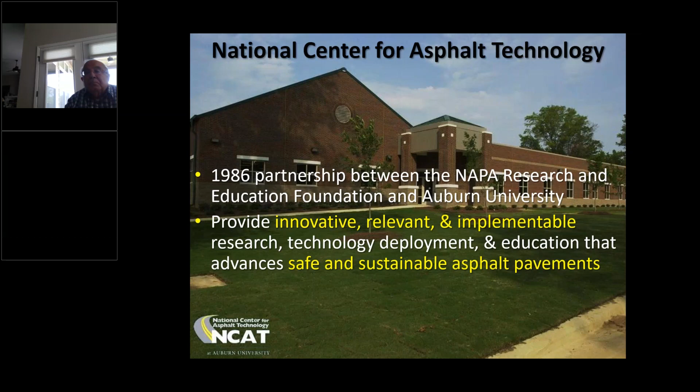Our mission is really straightforward. We do innovative, relevant, and implementable research geared towards safe and sustainable asphalt pavements, improving the value of asphalt pavements. It's a very rewarding endeavor, because we don't have an agenda. We just do research to try to make the product better and advance it. So that's the blessing to all of us.

NCAT is a nonprofit research center at Auburn University, so we don't get any earmarked state dollars or university dollars or anything like that. We execute research. The NCAT pavement test track is the biggest project at NCAT, and it has been the biggest project since we broke ground out here in September of 1998.

You can think of it as a nonprofit business. We don't get any earmarks, the track doesn't get any earmarks. We sell research to FHWA, to state DOTs, and private sector partners. Essentially, we sell test sections on the track and execute research with cost recovery for our test sections, with no profit or anything built into that.

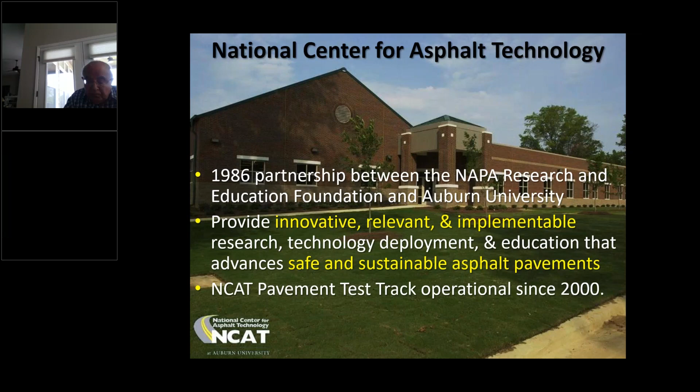This type of research is called accelerated pavement testing. We do accelerated damage, meaning that within these 3-year project cycles, the middle 2 years compress a design lifetime of pavement damage. For us, that's 10 million equivalent single axle loadings, about 1.5 million miles in 2 years of our fleet operations, using trucks like the ones you see right there.

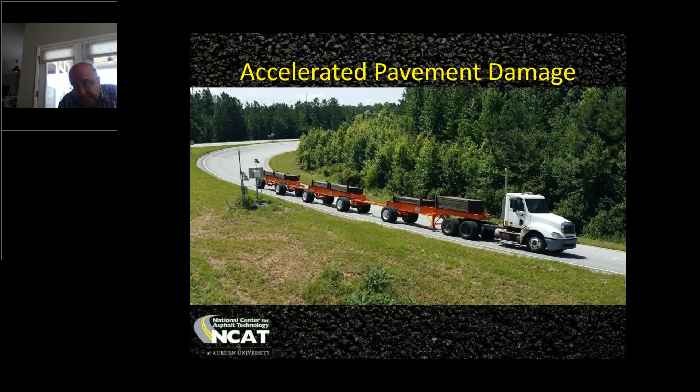We run 5 of these at a time, 5 days a week, from about 5 in the morning to about 11 o'clock at night. We shut down 1 day a week and do really detailed pavement condition assessments on the track.

I'm telling you all this as background so that you have a feel for the innovation I'm going to talk about has been proved on the track. We've supported it with implementation for projects we've done off the track, and it really all goes back to this accelerated testing that we do here at the facility.

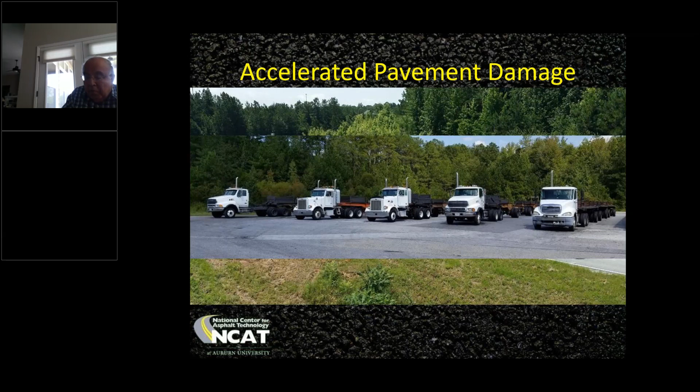Now, these trucks have really high gross vehicle weights because we don't have any bridge spans to collapse, but every individual axle is loaded up to but not beyond the federal legal bridge limit. We do that so we can have the safest and most efficient fleet operations possible in order to compress all this pavement damage.

So that we can have a thermal cracking focused performance to compare to our southern, more fatigue focused performance here at the NCAT pavement test track.

We're very proud of our relationship with the Missouri DOT. Missouri has been a partner here at the facility for about the last 15 years, has been one of our funding partners. We've done a lot of good research for Missouri, and we're excited about continuing that relationship into the future.

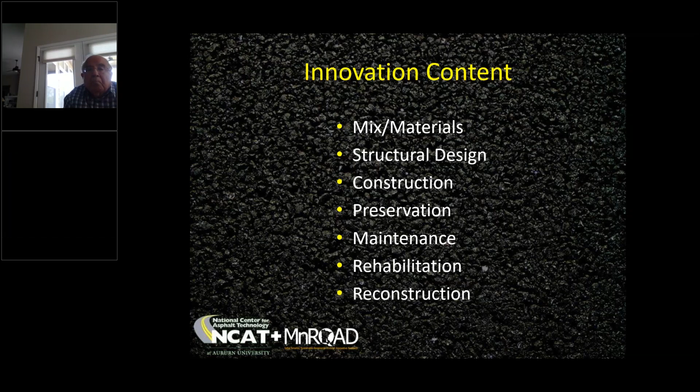So for the sake of this presentation, I thought about the conversation that Rick and I had, and the holistic approach to asphalt pavements. I'm going to touch on each of these areas. I've only got 45 minutes, so I'll go through this pretty quickly, but we're going to go all the way from mix and materials through thickness design, construction, preservation, maintenance, rehabilitation, and reconstruction. As we discuss innovation in these areas, the advantages of asphalt pavements is really self-evident in all of these areas. I know all of y'all are professionals, so everybody knows the terminology, but I wanted to have one slide where I explain the references that I use, just to make sure we're all on the same page.

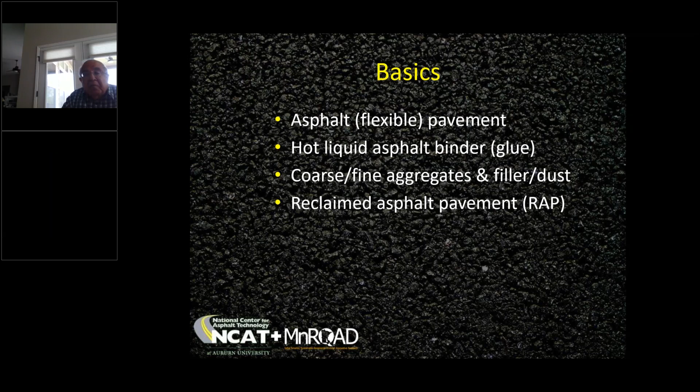So you hear people talk about flexible pavement, that's the same thing as asphalt pavements. Hot liquid asphalt, that's the glue that holds everything together. You got rock, you got sand, and you got filler or dust that you're binding together with the asphalt glue. RAP, of course, that's reclaimed asphalt pavement. RAS, recycled asphalt shingles. You'll hear me several times in the presentation refer to what I call premium mix additives - for example, aramid fibers, highly polymer modified binder, or epoxies. That's kind of a general term we're now beginning to use as we talk about adding materials to our plant mix in order to improve various performance characteristics.

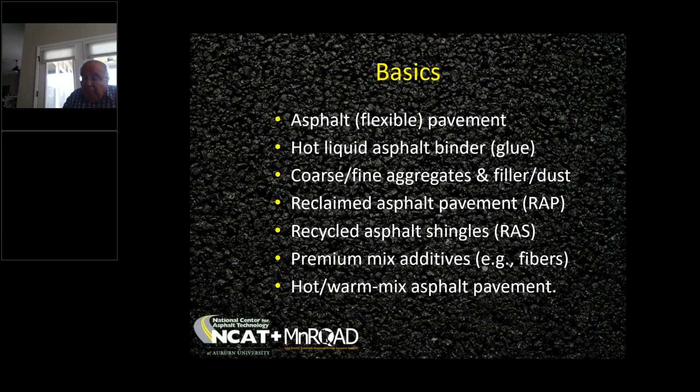And then finally, hot versus warm mix asphalt - I don't even like to distinguish between the two. I say this as a former agency guy: I think every mix has a unique temperature it should be run at, some without the warm mix technologies and some with them. I don't think it's a good idea to say everything run under 275 is warm mix and everything hotter is hot mix, because I've run warm mix at 300 degrees before here, because it would have otherwise been a super hot technology because of what we were doing at the time.

So I just like to refer to plant mix asphalt, and it kind of encompasses hot mix and warm mix. So I'm going to go back and touch on all those content areas. For the last 30 years we've been working on Superpave for better mixes, and that Superpave gave us better aggregate specifications. It gave us performance graded binders with high temperature, mid temperature, and low temperature performance, with and without aging. And then we got better understanding of mix volumetrics with Superpave, and those were all tremendous improvements over the mixes we had been doing up until that time.

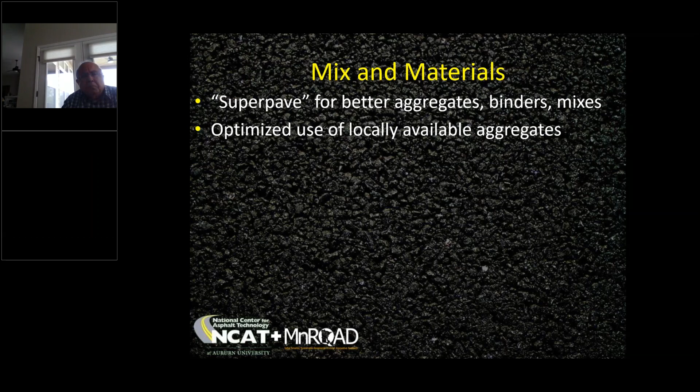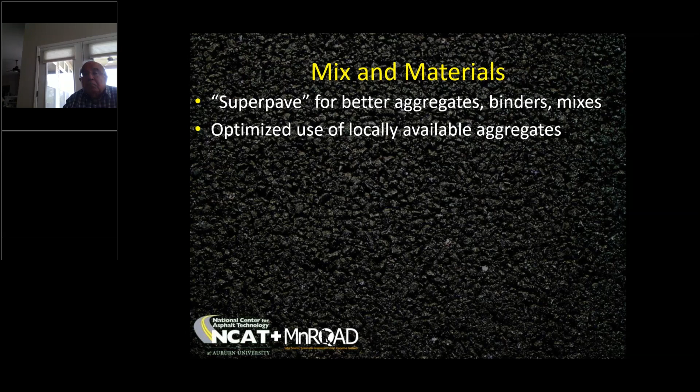And of course, the core of that is optimized use of locally available virgin aggregates. Virgin aggregates are becoming more and more scarce in different parts of the country, because we're having issues now in some states where there's no new quarries, and the number of active quarries are declining as those sources play out. So we're working to do as much recycling as we can while at least maintaining, and ideally improving, performance.

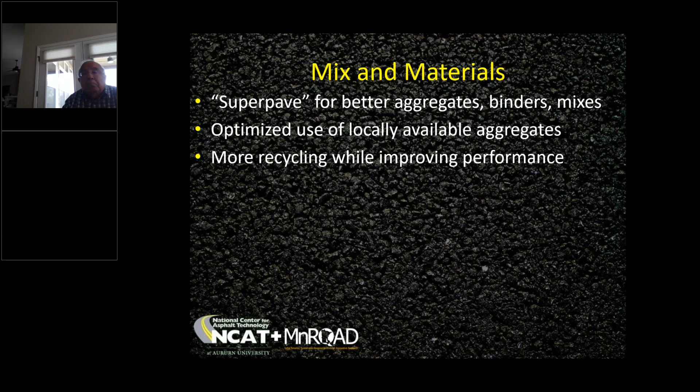And we've done research now on the track - we actually know how to do this. We know how to increase the recycled content at the same time that we improve performance. And we do that through the targeted use of materials in the various layers in a pavement structure.

Part of that equation is the selective use of polymer modified asphalt binders. At the very bottom of the pavement structure is where fatigue cracks start, and polymers have a place down there. Polymers also have a place near the surface where shear stresses are higher and rutting is going to be more of a concern. Then, depending on the structure, you can load up the middle of the pavement with a higher percentage of recycled material without using polymer modified binder. So it's all kind of a comprehensive view of the pavement structure.

And even highly polymer modified binder, commonly referred to as HIMA, is an important part of the selective use of polymer, because with HIMA binders you can get the performance of additional structure without the additional structure. So you can make a thinner pavement behave and perform like a thicker pavement, and that's important when you've got curb and gutter restrictions or grade issues like bridges, or structural issues where you just can't have enough pavement thickness. You can essentially create thickness-type performance using these HIMA binders.

We use porous pavements, sometimes on the surface of roadways as a safety enhancement, but we can also use them in parking lots for stormwater retention, where we're storing stormwater runoff underneath our parking lots. That's a big deal when it comes to maximum use of available land resources.

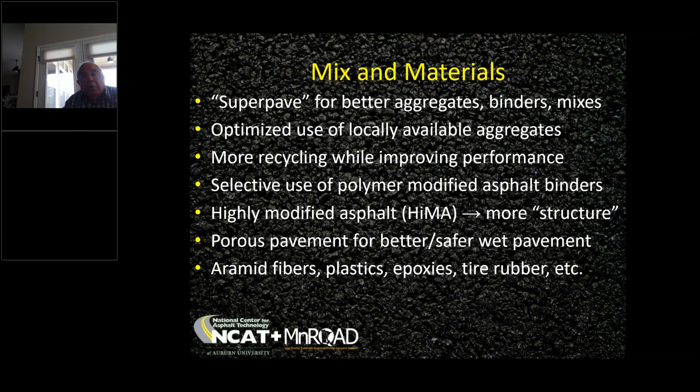We did ground tire rubber research for Missouri back years ago when we had an SBS polymer shortage, and we know that we can use ground tire rubber in positive ways to build good pavements. It just kind of comes down to the cost of materials, the cost of all the available materials and such. And there's a growing list of mix additives and technologies that we can't imagine today that'll be rolling out 5 years from now.

And then finally, performance optimized mix design and construction, otherwise known as balanced mix design, is kind of the next step beyond Superpave. Most states had Marshall mixes up through the 80s, and then we got into the 90s and evolved into the Superpave era.

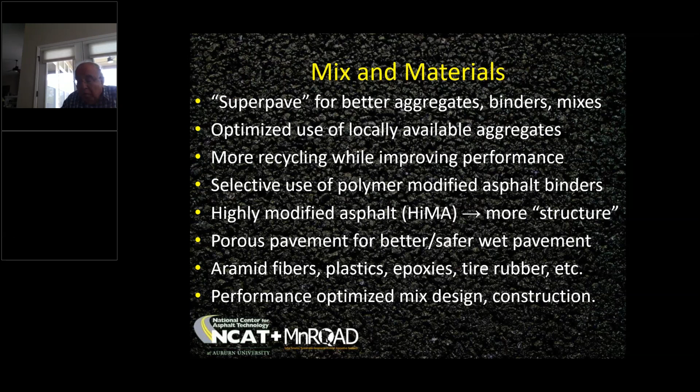Well, now we're evolving into balanced mix design, where we have a better understanding of the testing resources that are available because of research that's been done at places like the NCAT pavement test track, which can create a lot of value for flexible pavements, or for asphalt pavements.

Probably everybody in this web meeting has heard of this term, balanced mix design. Really all it refers to is, instead of using volumetrics to optimize the proportioning in mixes, we're going to use performance to optimize the proportioning in the mixes.

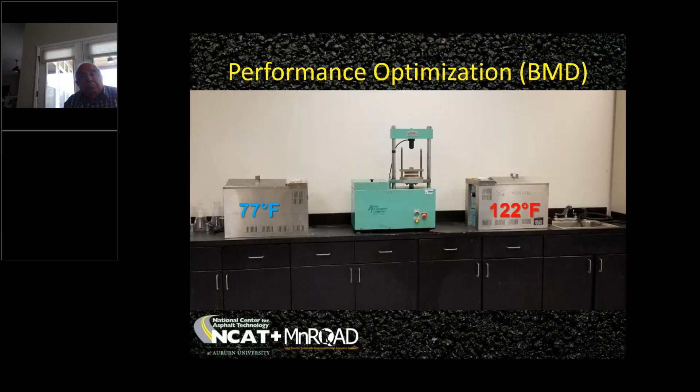Now you can do a manual analysis of the load plots if you've got one of these devices, but now there's smart jigs you can put inside these machines to do automatic data collection. And the idea with this is that we can kind of balance rutting and cracking, using the relationship between those two performance parameters to optimize the amount of asphalt that we put in our mix.

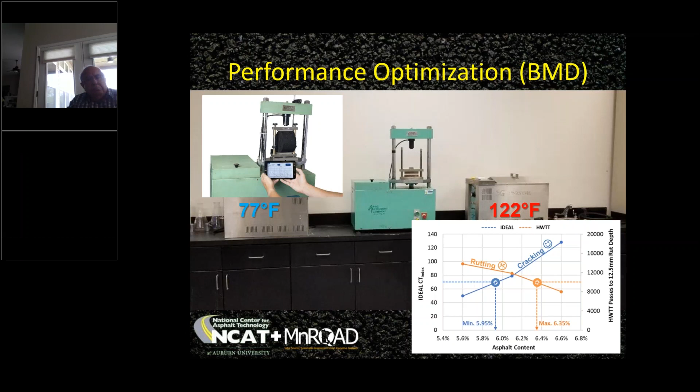I like to show this example when I talk about this, because this is actually real data from one of our projects, where the volumetric optimum asphalt content for this 9.5 millimeter NMAS mix was 5.6. But if you look at what the performance optimized range of asphalt contents is, it's anywhere between 5.9 and 6.3. So the observation I make, if you look nationally, I think a lot of our mixes can take 0.5% more asphalt than we're currently putting in them for volumetric optimization, and it can create significantly better performance.

And there are a lot of other tests out there. These are the ones that I talk about a lot, because I think it's important now that we can run actual balanced mix design performance tests during production to provide some assurance to the customer, or the client, whoever it is you're building for, that the mix is going to perform really well in cracking and in rutting. And these are really simple tests that don't add a lot of cost to your laboratory testing resources.

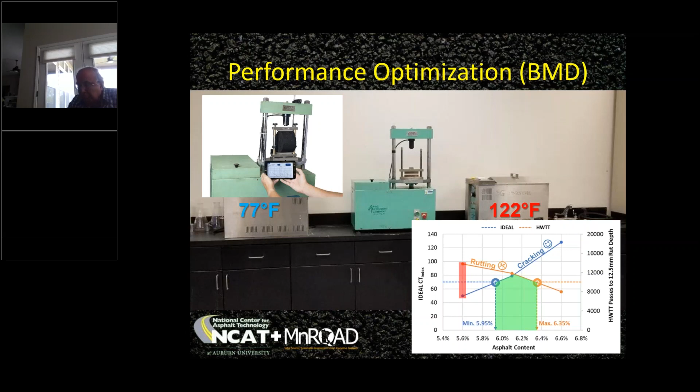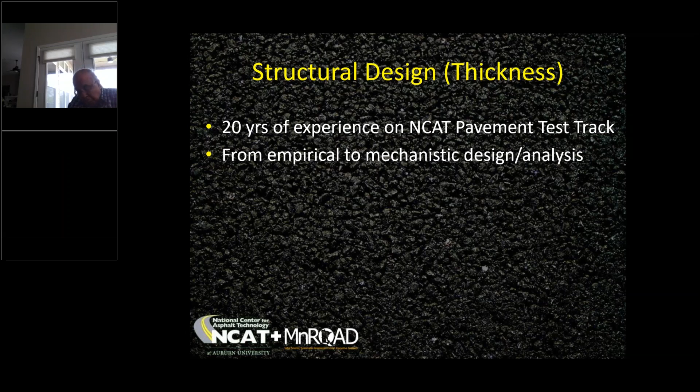So that brings me to the next area, structural design, or how thick does the pavement need to be? We've got 20 years of experience here at the test track with a big focus on that question. We do empirical research and mechanistic research in pavement thickness design. Empirical refers to relating everything back to the old AASHO road test and using layer coefficients to do pavement thickness designs. Mechanistic means using stresses and strains and a transfer function to do a thickness design.

I'm an old school guy, so you've got to prove to me that something's better. I'm not going to get excited about something just because it's new. I want to see data that convinces me it's the right thing to do.

We really do need to change the way we design pavement thickness, because of this concept of perpetual pavements. You design a structure thick enough so it never cracks from the bottom up, then you can just do preservation and maintenance on the surface, really shallow work, and that pavement can last forever. A forever resource, which is a huge advantage to asphalt pavements.

When we first built the track, the perpetual thickness design using the 93 AASHTO design guide, the computer said we needed 2 feet of asphalt. We later learned that using the exact same materials, 9 inches of asphalt was perpetual. So all that extra thickness, everything between 9 and 24 inches, was essentially wasted money. We didn't need that thickness to get the same performance of that forever pavement foundation. We later found that using innovative additives, we could go as thin as 5 3/4 inches with highly polymer modified binder and still get perpetual performance.

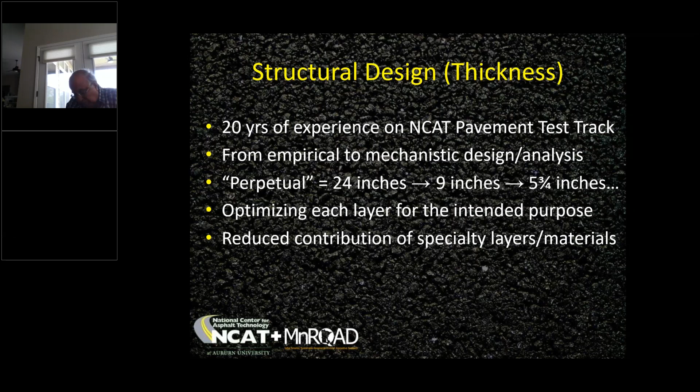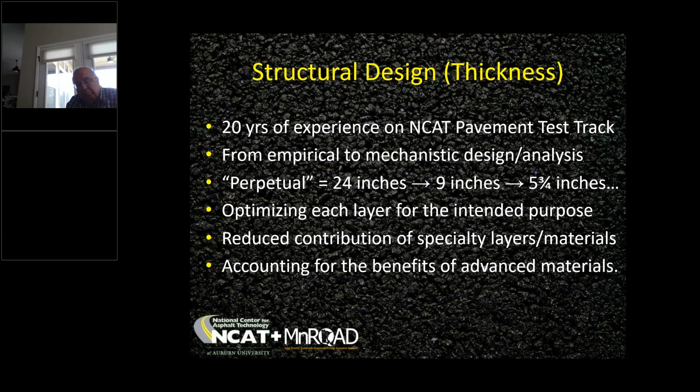A big part of thickness design is accounting for the benefit you get from advanced materials. Going from 24 inches to 9 inches to 5 3/4 inches—how do you quantify that? We have really good guidance developed from the track to help us do that.

This is 100% RAP cold recycle mix that we produced in our hot mix plant, a double barrel green hot mix plant with the burner completely off. So we didn't have to have any specialty equipment for this. And it doesn't have a whole lot of hot mix on top of it.

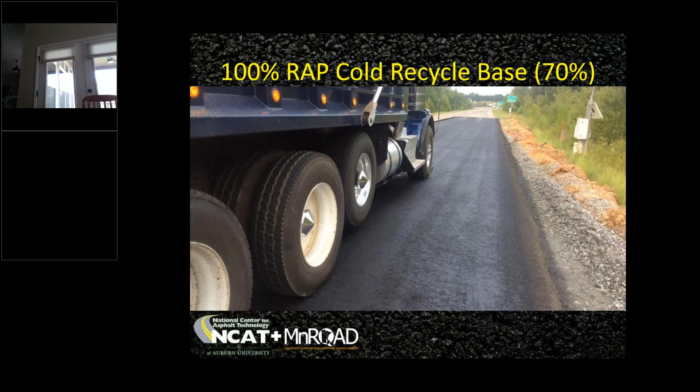It's been on the track now for 17 million equivalent single axle loadings, and is one of the best performing sections that we have in this experiment. So if you've got a lot of RAP and don't have something good you can do with it to optimize its value, like fractionation and running it in hot mix, one possible use is a 100% RAP cold recycle base mix.

Now, I wanted at this point to speak briefly about the additives. How do you account for them? We know what kind of contribution we can get from the HiMA binder, the highly polymer modified binder, but we're doing an experiment on the next track that we'll build next summer, where we're going to build really thin pavements, 5-inch thick pavements.

We're going to use this experiment to come up with layer coefficients for the Kevlar fiber mix, or for epoxy mix, or for dry or wet process rubber mix. We know from past research that with our base and subgrade, 5 inches of asphalt fails after just a couple million ESALs, 20 to 25% of the way through one of our traffic cycles. So this is a very aggressive experiment to quantify the structural contribution of these additives, like fibers, plastics, epoxies, rubber, anything else that might come along.

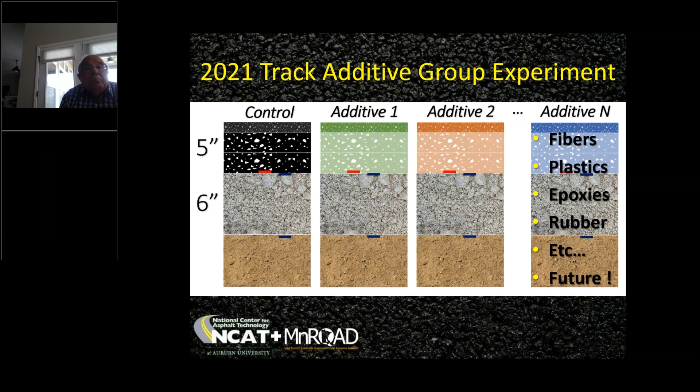A big part of this is a laboratory validation process that DOTs like MoDOT can use in the future. If somebody comes out with some new type of fiber, this experiment is going to essentially develop and validate a laboratory evaluation process, so you don't have to do big track studies or big field projects for future additives as they roll out. We're really excited about this experiment, and we'll actually be making the pitch for this to MoDOT when we meet with them to talk about what they want to do on the next track.

So moving on to construction, of course, the foundation of good construction is good materials, good designs, good effort by the contractor, and good inspection by somebody to make sure that we haven't missed anything and everything is going like it has the potential to go.

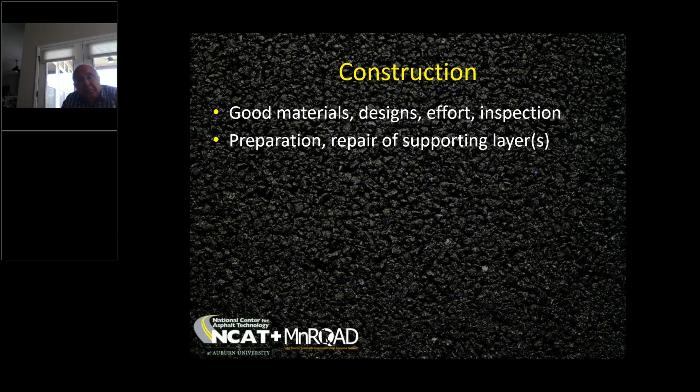Of course, preparation and repair of supporting layers. All of y'all are professionals, and you know how important this is. We've done things on the track to quantify the effect that those types of things have.

Balanced mix design testing during construction - that's a great tool that we have, where you can provide the owner, or the purchaser of your product, with assurance that this is a great mix, it's not going to crack and it's not going to rut. That's a huge step in the right direction.

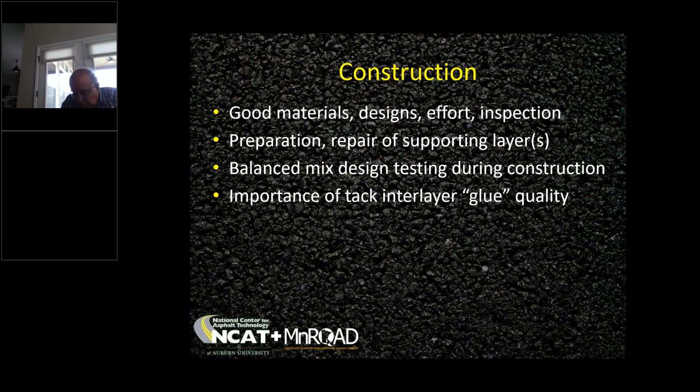We learned a lot at the track about the importance of tack interlayers, the glue that holds everything together. You can build a good pavement, but if you don't glue the layers together right, and it separates, it debonds at the layer interface, well now you've got a thicker pavement that's going to behave like a really thin pavement, and it's going to crack, and performance is going to be very bad. So tack quality is very, very important.

The importance of achieving good compaction - we have a couple different experiments on the track. One focused on what happens to performance when density goes from a target of 94 all the way down to 88% at different levels in between. And then we've got one that FHWA has funded, looking at what happens when we achieve a higher level of compaction than the typical 94% DOT target.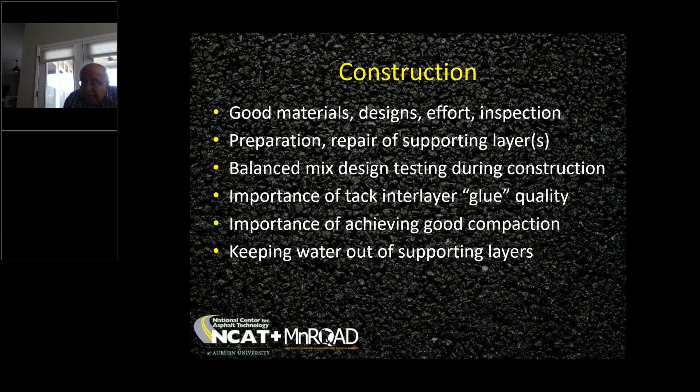We've done research. We know that higher levels of density produce better performance, and we're working now to quantify what happens when a DOT makes a decision to accept a job based on lower density. Of course that's important. I kind of put this presentation together with a focus on roads, but also trying to scope in parking lots and other types of flexible pavement, asphalt pavement structures. You've got to keep water out of supporting layers, and density and tack and all those things are really important to keeping water out of the base and the subgrade so you can have good performance.

One of the ways you can overcome the potential liability of poor tack performance is to do a full depth rapid rebuild. This is an exciting study we're doing right now for South Carolina. South Carolina DOT has really high traffic truck lanes that are completely failed, and they wanted to know, can we go in there and do 1,000 to 2,000 feet overnight and do a full depth rebuild, a really thick layer placement in a single pass? Because the book says you can't do that, but can we do it?

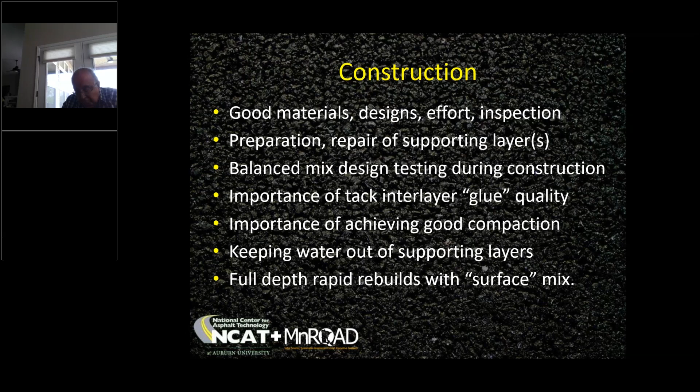And if we do it, what kind of smoothness are we going to get, and what kind of density profile are we going to get? So for this experiment, we did 3 different test sections with between 7 and 8 inches of mat placement, using a 12.5 millimeter nominal max aggregate size mix that we did in a single pass, compacted 8 inches in a single lift, and we cut our cores and did density profiles.

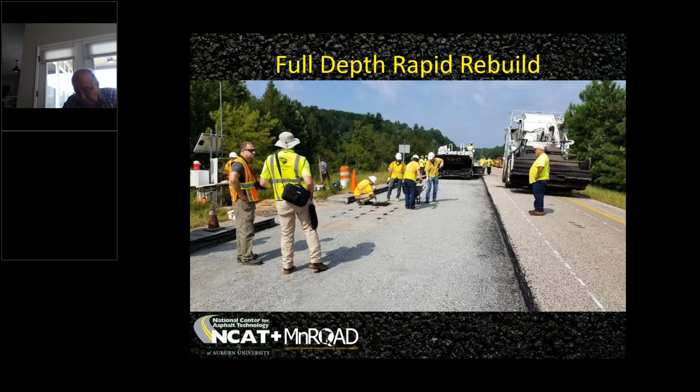We ran this with warm mix technology, and this was just kind of a typical South Carolina DOT type mix. Construction went well, and performance has been outstanding. The only issue with this is smoothness.

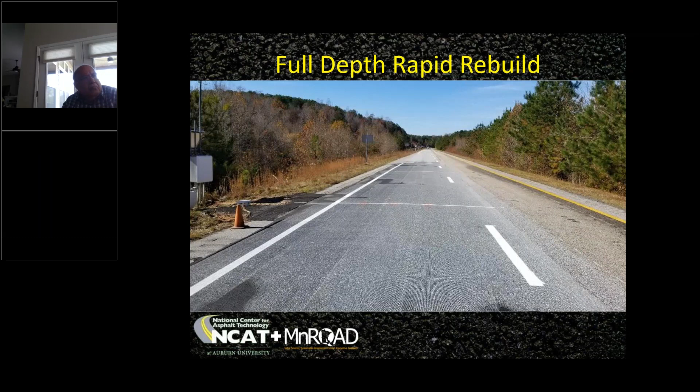So in South Carolina we knew going into this we were going to have some smoothness issues. We came back and diamond ground one section in order to make it smooth enough to be acceptable for an interstate. But then in 2 other sections, we came back and said, okay, let's put thinlays on top of that full depth rapid rebuild and see how much smoothness correction we can make.

On the top of this slide is a 4.75 millimeter nominal max aggregate size dense graded mix that was placed 1/2 inch thick. And the one on the bottom is a 4.75 SMA that was placed 3/4 of an inch thick. In both of those cases, we were able to bridge over the roughness issues associated with that thick placement, and the roughness is not reflected in these surface mixes.

Now they've been down for 7 million ESALs, and performance is really good. This is potentially a game changer, and it allows you to think outside the box.

So if you've got a project where you need to rebuild quickly, we have this notion in our minds that, okay, we're going to do a 19 millimeter base, maybe a 12.5 millimeter intermediate and a 9.5 millimeter surface, and these are the thickness ranges we're going to use. Well, you're not bound by that, because we proved in this research cycle on the track that...

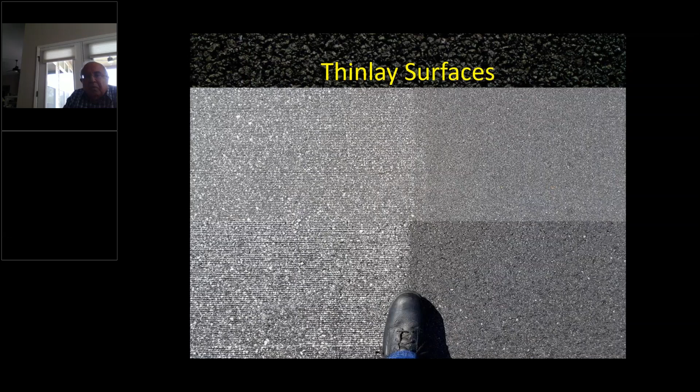...the nominal maximum aggregate size, the thickness to nominal maximum aggregate size ratios that the book says we have to use, you can actually work outside of those. You're not bound by those factors, and we saw really good density profiles. We actually did 4 of these mats like this, full depth rapid rebuilds, and they've all done really well.

But those thinlays now are kind of my turning point to my next topic, which is pavement preservation. This is sort of the theoretical pavement deterioration curve, or pavement condition curve. With this curve, if we do things early in pavement life, or if we catch deterioration early, then we call those activities preservation.

If pavement condition deteriorates further, we call that rehabilitation. And then finally, when it gets bad enough, you've got to rebuild - we call that reconstruction. There's actually an ASTM standard for pavement condition index ratings that you can kind of overlay onto those bands in that pavement condition curve.

Then you can say, okay, if my pavement's in really good shape, I can do lightweight stuff to it. But as it completely deteriorates and fails, there's more effort that I have to put into this. But one of the good things about asphalt pavement is if you've got a customer who is very proactive in...

...taking care of something like their parking lot, there are some very, very low cost things they can do to the surface of that parking lot that will extend pavement life. But at the same time, if you've got a customer that's neglected a parking lot, reconstruction can be done at a relatively low cost compared to other pavement options.

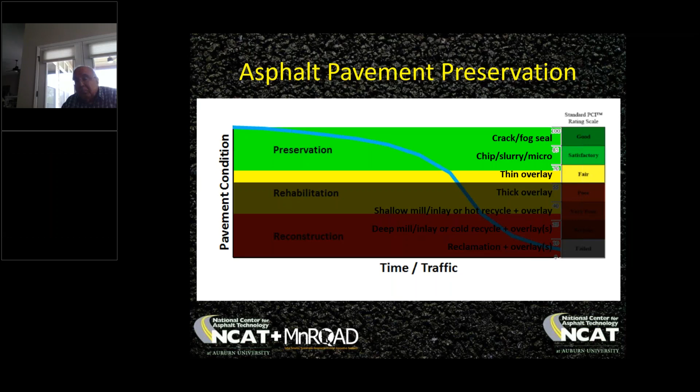Reconstruction can also be done if the owner has not been proactive with pavement preservation. What you really want to do is promote, if you're managing a pavement as an asset, either with an agency or out in the private sector with parking lots and connector roads, staying up in the preservation zone, maybe just into the rehab zone.

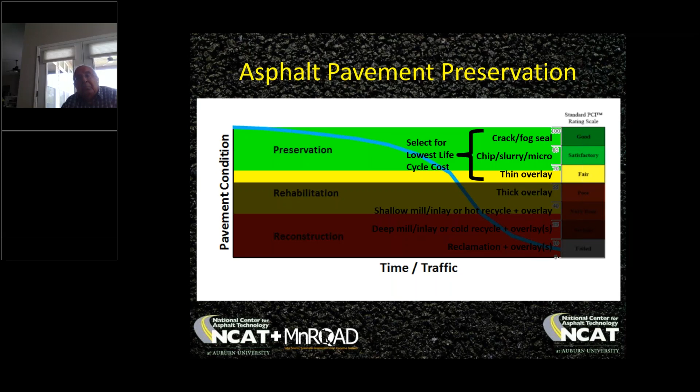So that you're looking at anything between thin overlays - which for me, a thin overlay is 3/4 inch or thinner - all the way up to crack sealing and fog sealing. And when you do that, you can ideally select the options that give you the lowest life cycle cost of ownership of those structures.

So in order to really investigate this, we've done research on the track and off the track, and down south and then up north in Minnesota.

We like to do preservation research off the track because that accelerated pavement damage stuff we do on the track is a really, really harsh, destructive environment. We're really challenging our pavements on the track.

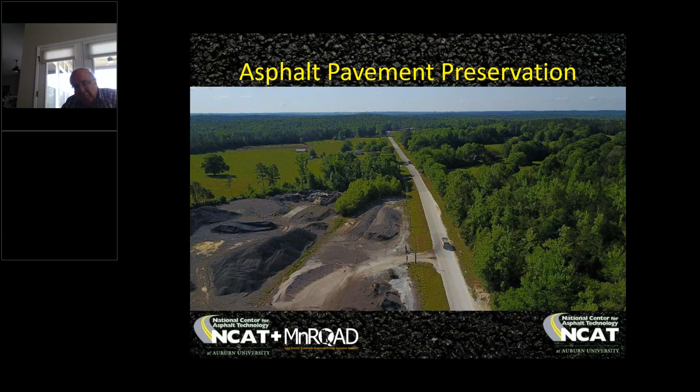We put thin lays, microsurface, chip seals, cape seals, fog sealing, crack sealing, and different combinations of those things, so that we can compare distresses at the rate they come back compared to what different levels of condition these sections were in before we placed them, and we can begin to develop life cycle curves for these treatments.

For example, this is a benefit curve for a single layer microsurface. In these curves, the solid lines are cracking that we map after treatment, and the dashed lines are where cracking would be based on control sections if we had not applied the treatments.

For single layer microsurface, what I've shaded in yellow is the benefit of microsurface when the pavement is in fair condition before the microsurface is applied. You can do the same thing for good and for poor. What you see here is single layer microsurface does really well, with approximately the same performance in good to fair condition, but it really takes a nosedive when you go into poor pre-treatment cracking condition prior to placement.

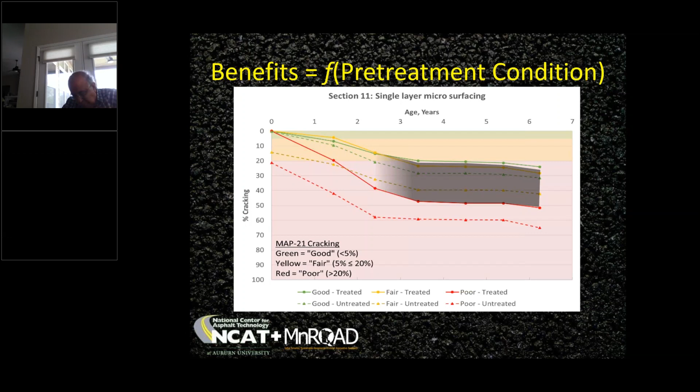What this means is if your pavement's in poor condition and you put a single layer microsurface down, the cracking is going to come back really quickly, and you're going to get water into the pavement structure, and it's going to kind of go bad on you.

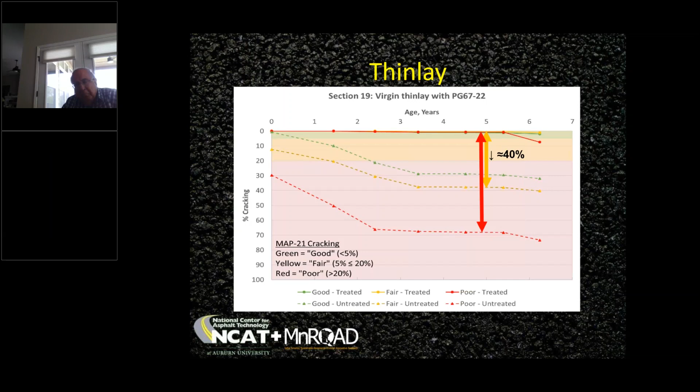Compare that to the thin lay test section on Lee Road 159, where we've got a high traffic version in the south, and then low and high traffic versions up north in Minnesota, with all the same treatments. What you see with the thin lay is significant benefit, regardless of whether the pavement was in good, fair, or poor condition.

You can take that type of cracking reduction information and, for example, go into year 5, look at the cracking reduction at year 5 — the gap between the solid and dashed lines — for pavements that are in poor, fair, and good condition.

You see very similar performance between a virgin thin lay, a triple chip seal, and a double layer microsurface. So that gives you some information if you're an agency or an owner about what your options are and what kind of life cycle performance you can expect.

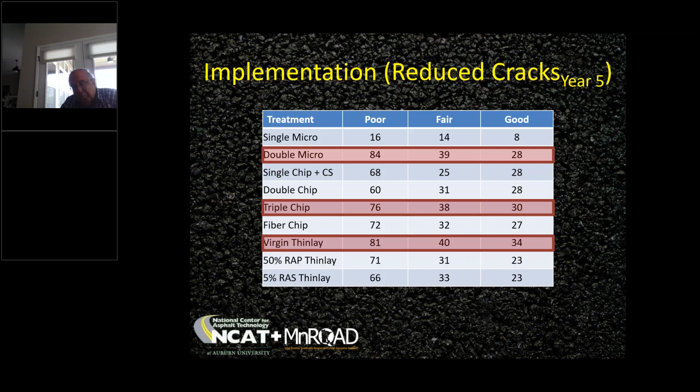You don't want to make a comparison between a single layer microsurface and a thin lay, because you'll get significantly better performance from the thin lay compared to the single micro, but you'll get very similar performance from a double micro compared to a thin lay. So cities, counties, and state agencies can factor in their life cycle costs based on these curves we're generating from this experiment.

Of course, maintenance and rehabilitation is farther down that pavement life cycle curve. So we've done other work on the track with interlayers to determine how an open graded interlayer compares to a chip seal interlayer, and how that compares to a dense graded, rich pavement interlayer.

We've got another experiment on the track right now that a lot of people are interested in, because there are 6 different sections: 2 plant mix, 2 chip seal, and 2 geosynthetics.

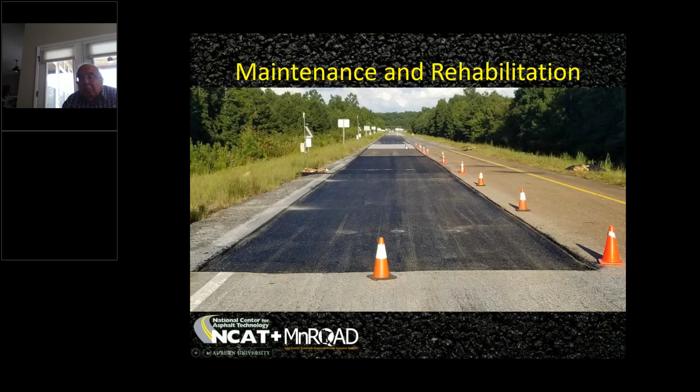The plant mix nearest to us is an open graded interlayer. The darker one past it is an Arizona rubber, highly crack resistant interlayer. These 2 are chip seals — this is a coarse fractionated RAP chip seal, and that's a virgin number 7 granite chip seal. Down at the far end is a geosynthetic fabric, and then a geogrid in combination with a non-woven fabric.

In all 6 of these sections, there are cracks underneath that we map — they're identical cracks in all 6. So what we're looking for is the recurrence of cracking, so we can report to Georgia DOT, who is a sponsor of this study. But because Missouri is a partner in the study, they also get the benefit of the results and implementation support.

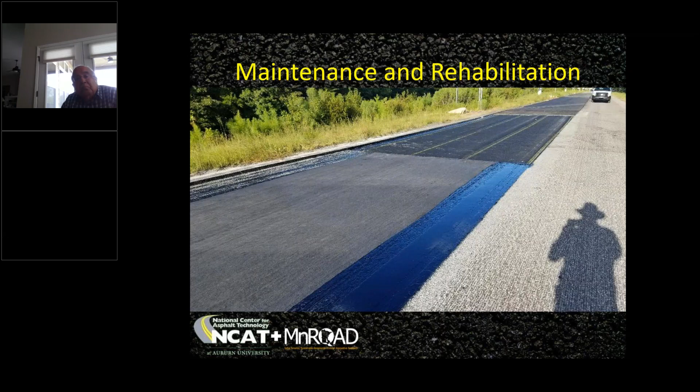This is great information, because agencies oftentimes can't go in and do deep work. They're just going to do mill and inlay work. So if you're going to do mill and inlay work, how can you prevent the recurrence of cracking in the most cost-effective way possible, if you fall farther down that pavement life deterioration curve?

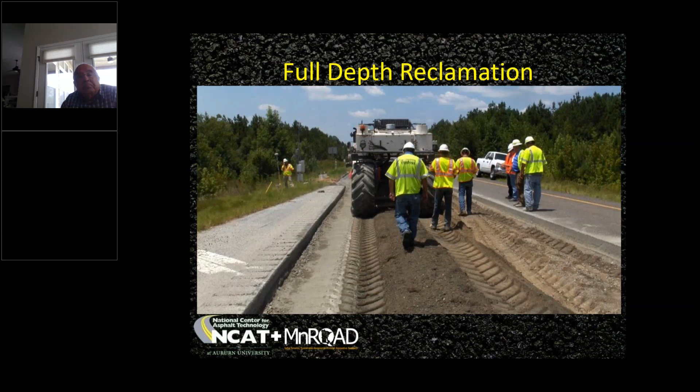The really nice tool we have for total asphalt pavement reconstruction is full depth reclamation. This is one of the versatility advantages of asphalt pavements. You can go out there and spread cement on top of the existing pavement and run through with essentially a giant grinding machine like you see in this picture.

You spread cement, you grind it up, and you can see the water truck out ahead - water is added while it's all blended up in this giant blending machine. This is a Wirtgen reclaimer being used here. You come behind it with a motor grader and blade it off. Then this cures for some number of days, like a 3-day or 7-day cure. You can come back and it's a very firm foundation you can build on top of. This is a great tool to completely rebuild a totally failed pavement structure, and you can come back and pave directly on top of this FDR foundation.

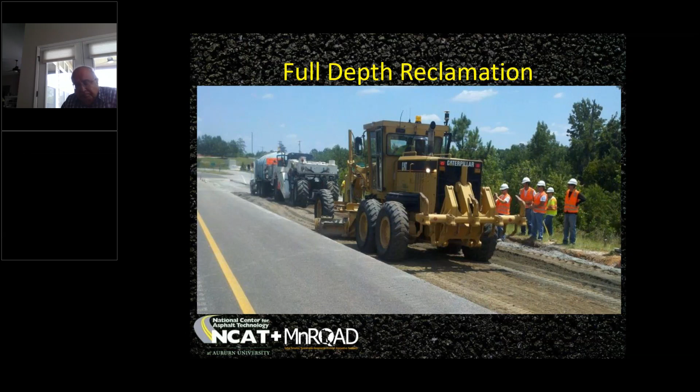We did test sections in Minnesota this past summer - we actually had 2 FDR test sections. We put 1-inch thin overlays directly on top of those FDR sections, and the results of that study were very, very positive. So that's a really good option. If you've got a county or city with a totally failed roadway, or an owner with a totally failed parking lot, you can do a rapid rebuild using this reclamation process, then pave asphalt directly on top of it.

To pull all this together into some takeaways - NCAT, as you can see, we're the neutral party between agencies and industry, and we're very blessed because agencies and industry both count on us for objective, reliable, and positive database feedback on these new technologies. The track is ground truth for these perpetual, last-forever asphalt roadways. So this is not just a sales pitch - we've got many years of data now to back this approach up.

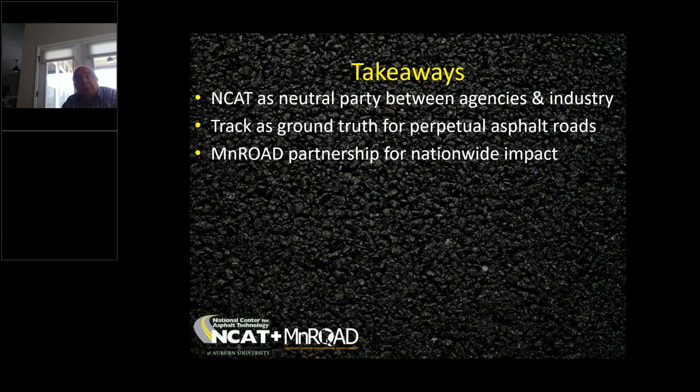We've got the MnROAD partnership, where we've scoped in cold weather performance. So when you get into the more northern part of the state - Missouri's farther north than we are - you do have some thermal concerns. Now we've got the MnROAD partnership to support that. And Missouri DOT, as I mentioned, has been a big sponsor in the track for the last 15 years.

Hopefully from this presentation you see we've made a lot of advances in mix and materials and structures and in preservation. The asphalt pavements we build today are not the same asphalt pavements we built up through the early to mid 1980s. It's a completely different engineered type of product. It's all about now our best use of available virgin and recycled materials.

We want to use as much reclaimed and recycled material as we can. And the idea that you can build any type of pavement and just walk away from it and have it be a forever pavement is a myth. Whether it's a rigid pavement or a flexible pavement, you're going to have to do preservation, maintenance, and eventually a rebuild at some point out in the future. But what is the utility cost of that?

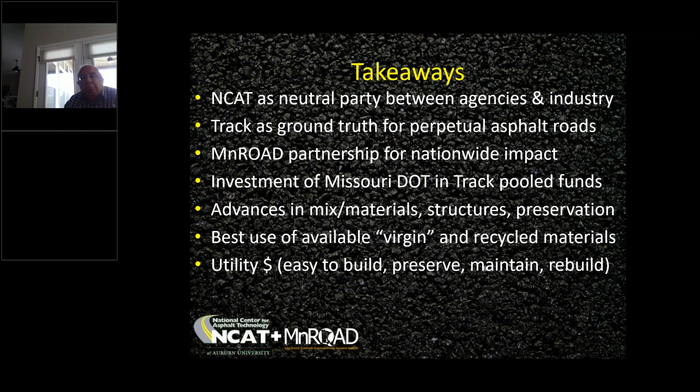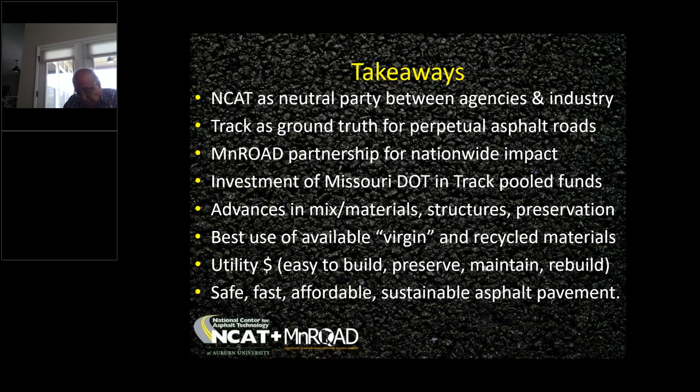Asphalt pavements are easy to build, easy to preserve, easy to maintain, and as you saw in this presentation, very easy to rebuild. That's the reason I'm really excited about asphalt pavements - they're safe, fast, easy, quickly built, affordable, and the most sustainable pavement structures you can possibly build.

Well, hopefully I ran about as long as you wanted me to run on time there, Rick. Do we have time for questions?